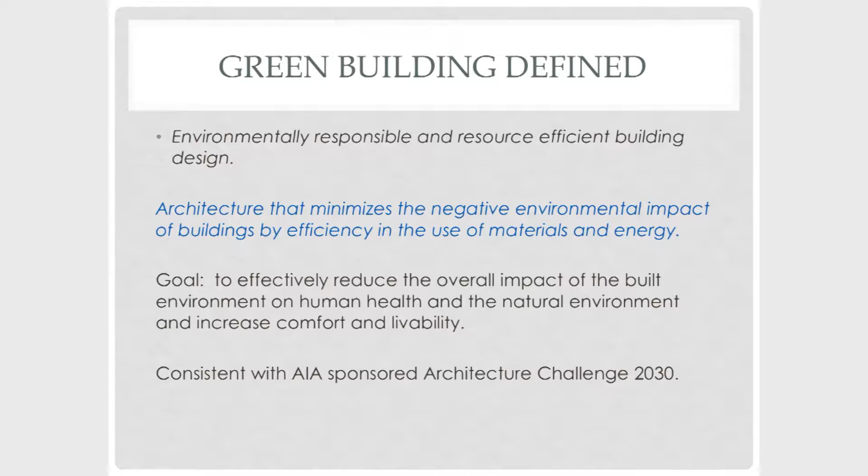Green building is an environmentally responsible and resource efficient type of building. It's architecture that minimizes the negative environmental impacts of buildings by efficiency. The goal is to effectively reduce the overall impact of the built environment on human health and natural environment and increase comfort and livability. So that's what green building is about.

This is consistent with the AIA-sponsored Architecture 2030 Challenge. I don't know if many of you are aware, but this is a movement taken on by the AIA president to take an effective leadership role in the crisis of climate change. It's been shown that the building industry is actually the worst culprit in this problem. This was not obvious to many, but as more and more smart people looked into this, it became evident that buildings are really the consumers of the vast amount of energy and the creation of greenhouse gases.

So it's very, very critical to change the way we design and build buildings to effectively address the problems that they create.

So this is, in a nutshell, the Architecture 2030 goal: through incremental steps, reduce the fossil fuel consumption of buildings by measurable metrics each 5 years, so that by 2030 we reach a carbon neutral state.

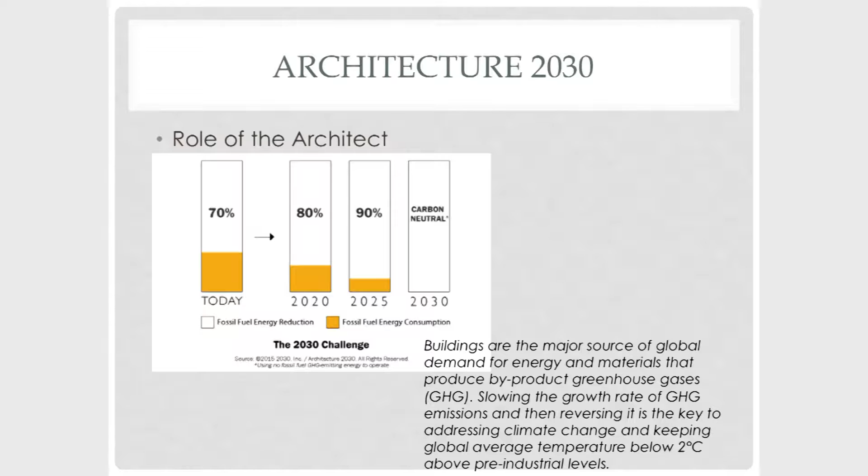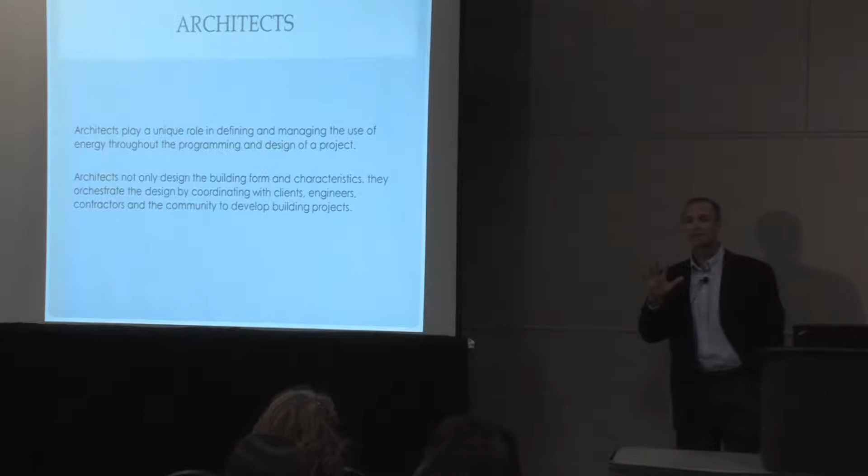So architects are key to leading, or at least being involved in this, in how the sustainability of the sustainable design takes place. So, while our built environment constitutes the problem, sustainable design and building offers the solution.

Green building aims to reduce the environmental impact of buildings. Clear and simple. The first rule is that it's always better to not build at all. If you have an existing building, then that is preferable to building new altogether, because new building always degrades the environment, and if we have plenty of building stock, adaptively reusing buildings, converting them to new uses to suit our needs, is far less energy intensive and far more preferable.

So the second rule is that every building should be as small as possible. The third is to not contribute to sprawl.

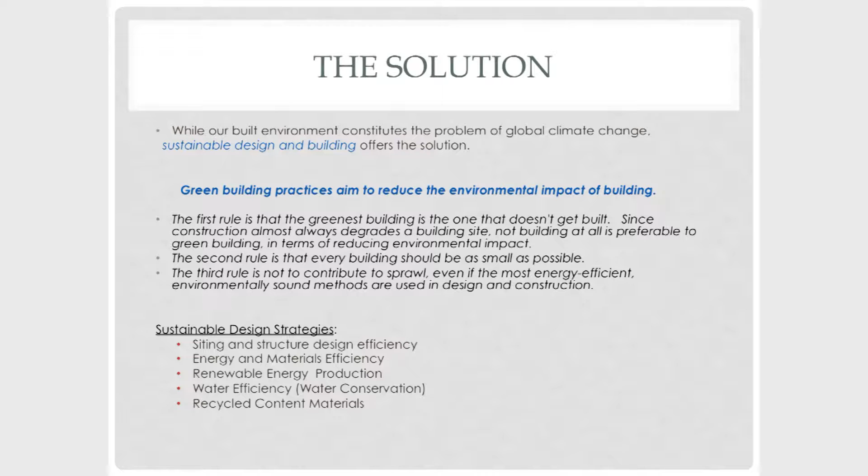There are several sustainable design strategies that are important that I'd like to illustrate: siting and structure design efficiency, energy and materials efficiency, renewable energy production, water efficiency and water conservation, very important in our state, and the use of recycled content materials. So the next few slides are going to illustrate these concepts.

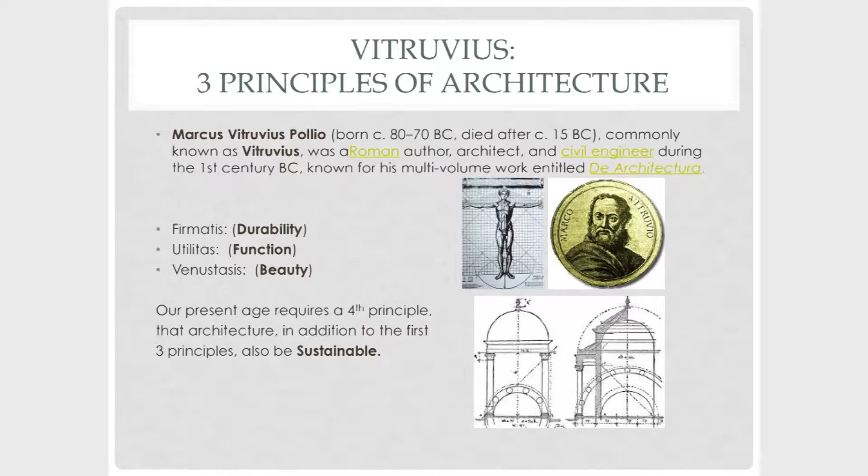Back in time, Vitruvius, a BC writer and designer, had established that for good architecture, you require durability, function, and beauty. Now, in our age, there's a fourth principle, and that's sustainability. But you cannot forego the other three in place of sustainability. Sustainability just gets added on to that. It still has to be beautiful, functional, and durable.

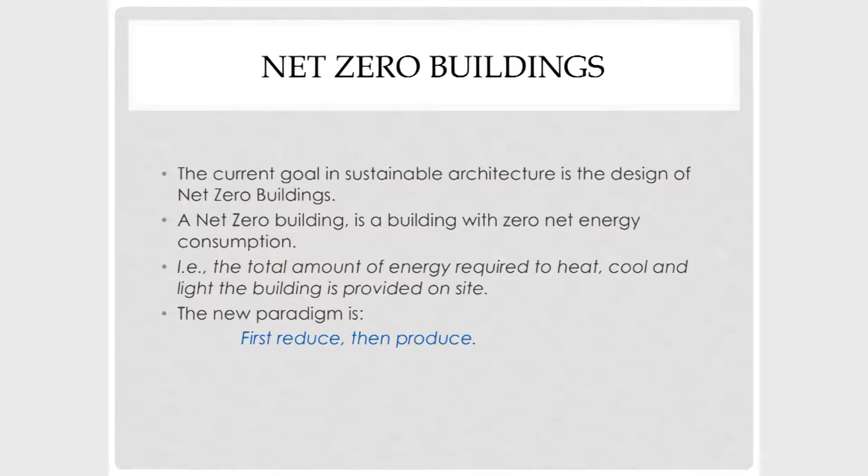So nowadays, the current goal of sustainable architecture is net zero buildings. We are aiming toward reducing the amount of energy used in the building by design to make the load of the building as small as possible. Then it's manageable, it's easy in fact, to provide that amount of energy with an on-site renewable energy system like wind or photovoltaics. So the paradigm is first reduce, then produce.

It doesn't make a whole lot of sense to just put a massive photovoltaic array on a very inefficient building. That's not good design. So this is an example of a net zero house.

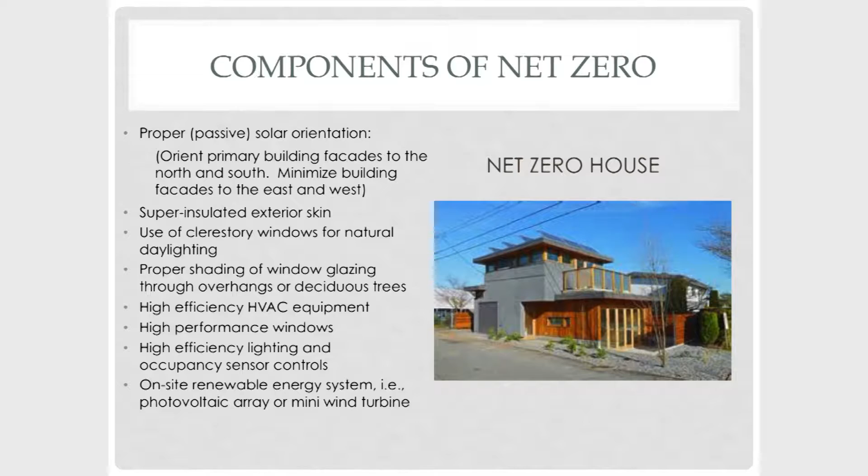This incorporates the following design strategies. First and foremost is to orient the building facade to the north and south, minimizing east and west exposures. Use a super insulated exterior skin, clerestory windows for natural daylighting so you don't need electric lights on during the day, proper shading of window glazing, high efficiency HVAC equipment, high performance windows, high efficiency lighting, occupancy sensor controls, and an on-site renewable energy system like a photovoltaic array or wind turbine. The next slides will illustrate each of these bullet points.

First, passive solar design with east-west orientation. The building is primarily oriented to the south and north, where it's easy to control how the sun enters. You want the sun to come in during the wintertime for passive heating, but not in the summertime. With the right length overhang or awning, it's very easy to achieve that.

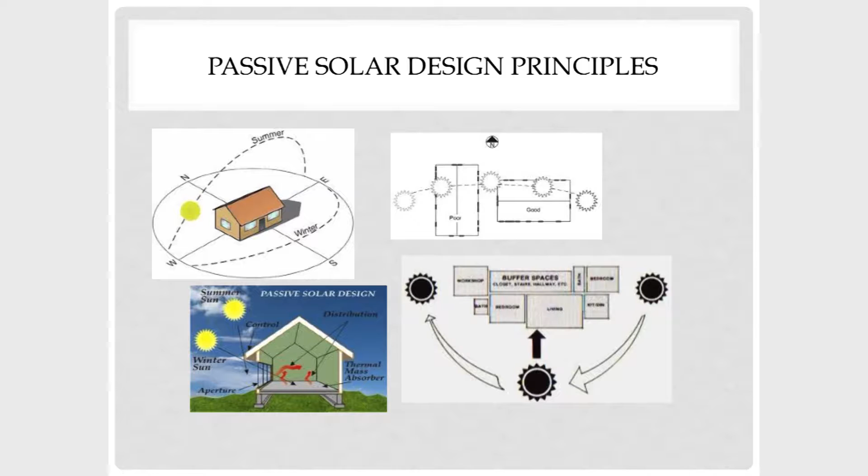Next, super insulation, which means going beyond code minimum. Code minimum in our area requires about R13 or R15 for the wall. You want R40 for a super insulated wall, and R60 for the super insulated ceiling. This results in an extremely well insulated envelope that keeps the heat and cool you're trying to maintain, reducing energy loads dramatically.

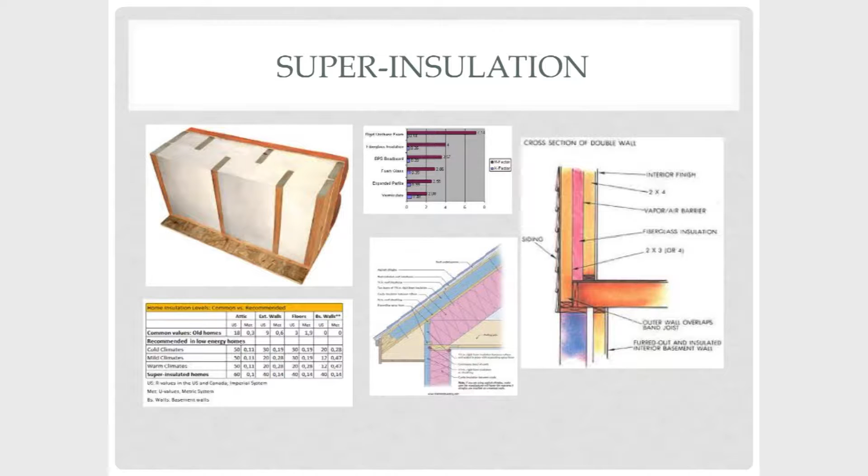You can also see this in the slide here. It's a very effective way to get a double insulated wall, but they stagger the studs so there's no thermal bridging. The studs constitute a weakness, a thermal bridge, where heat transfer goes more rapidly. By staggering the studs, you minimize that amount of heat transfer. It works very well.

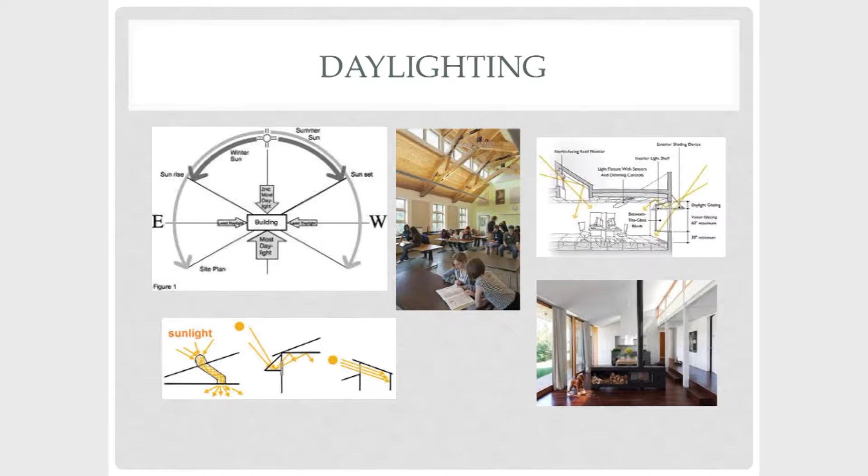Daylighting: windows up high in the space, shaded on the south, don't even require much shading on the north, will bring in ambient daylight and eliminate the need for electric lights during the day. These are very effective strategies, demonstrated especially in classrooms—these high-performance classrooms—and it's been proven in testing that kids test much better.

The learning environment is better when they have natural daylighting to work by. But it's the same with a house—it just feels better.

Shading devices: as I mentioned, awnings to shade the glass, exterior louvers. The idea is to keep the sun off the glass, because once it's inside the space, it's already heating things up.

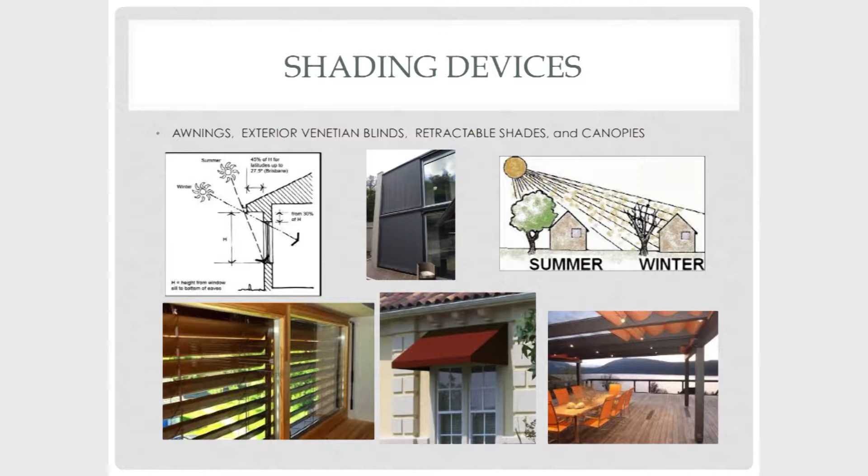This is an example of a properly sized overhang. It admits the low angle winter sun, which is what you want, but blocks the high angle summer sun, which is also what you want. That's a south facing window.

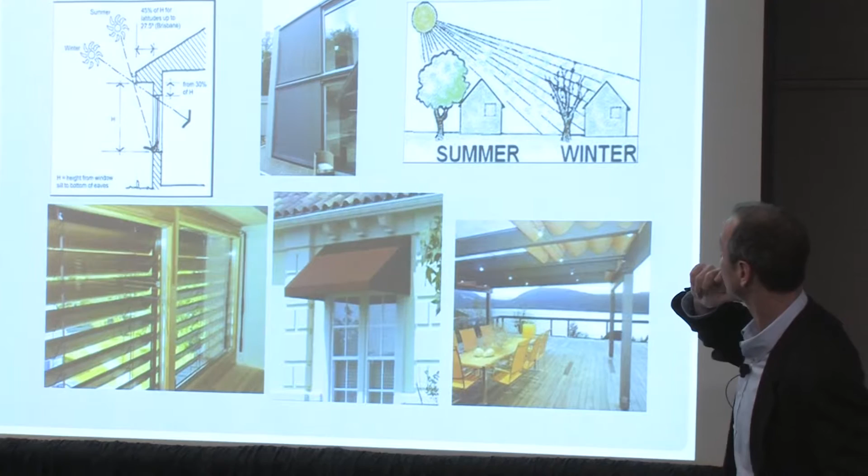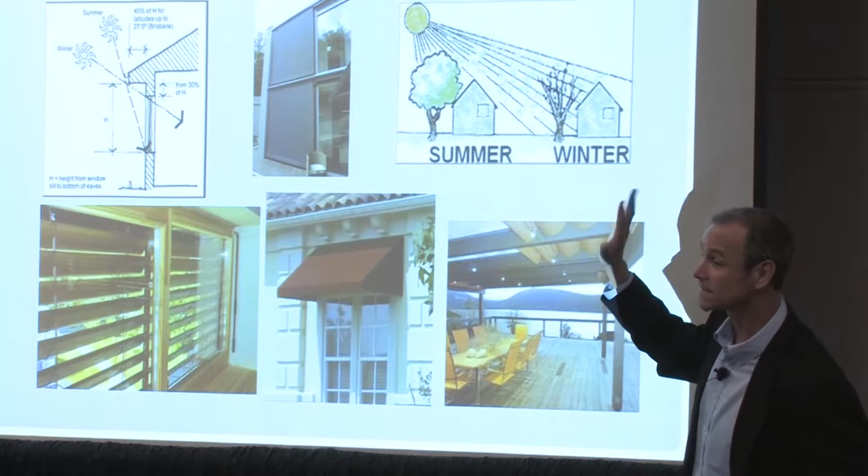In this diagram, we see that an effectively placed deciduous tree lets the sun in during the wintertime and blocks it out in the summertime. As simple as that.

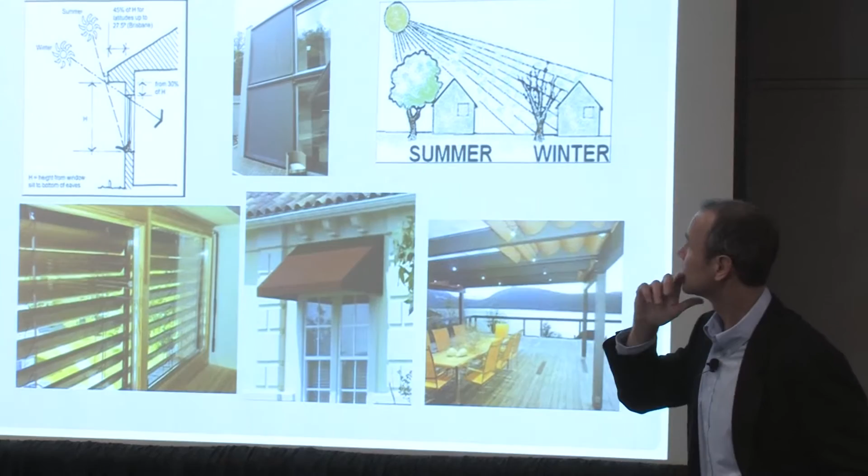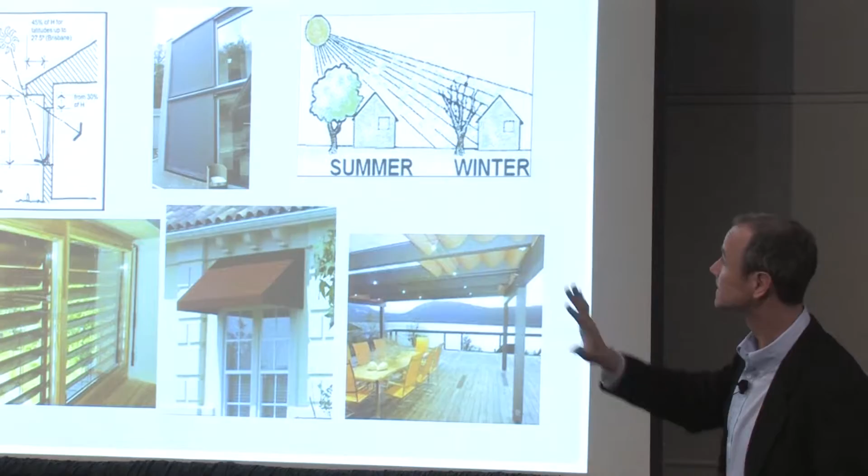Retractable canopy awning, and in this case, a retractable shade. These are kind of retrofit options that were installed after they realized that if they had designed proper overhangs, this wouldn't have been required.

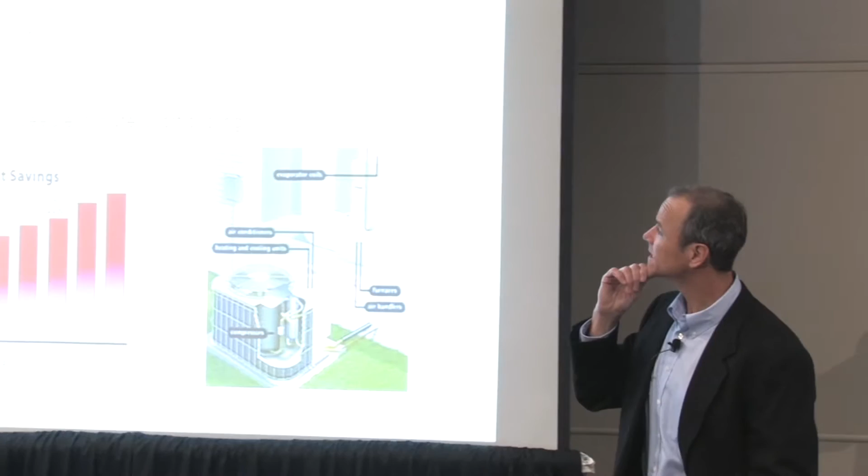Another component: after you've made your building energy efficient through insulation and design, you will need a much smaller cooling system in our climate to take care of the cooling load. But a high SEER system will operate at even greater efficiency, taking it to another level, as well as having a properly sized mechanical system so it's not oversized.

Typically, mechanical systems are oversized, and as soon as the thermostat registers that it needs to kick on, it blows too much air in, quickly cooling down the space in the summertime, and then cycles off. Five minutes later, that cool air is dissipated and it cycles back on. It's called short cycling, a result of inadequate insulation or sealing of the building combined with an oversized HVAC system, which just runs continuously and costs.

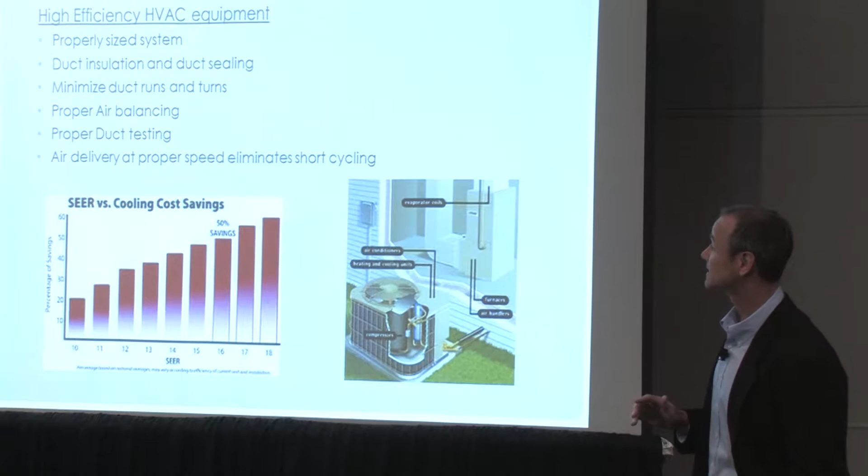This is where you're getting bills of $500, $600, $700 a month. When you've got this scenario, that's the reality. So a properly designed mechanical system is another critical aspect to the whole equation.

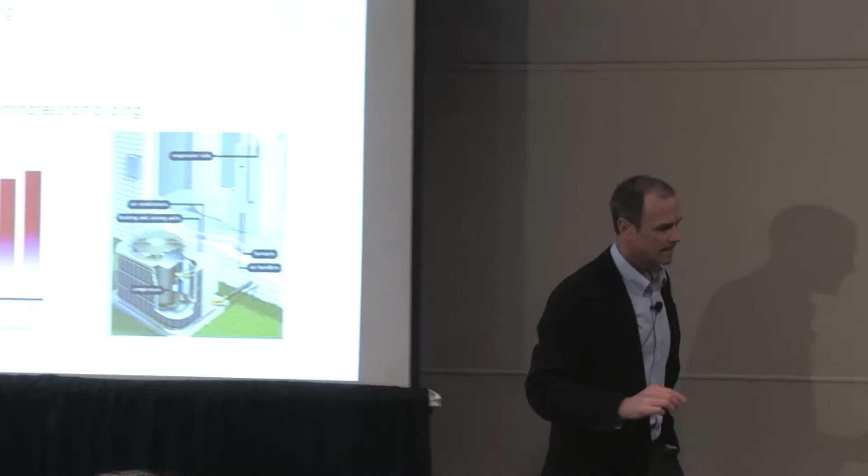What's SEER? SEER stands for seasonal energy efficiency ratio, and the higher the SEER value, the better. Nowadays, they're up into the 18, even 22 range.

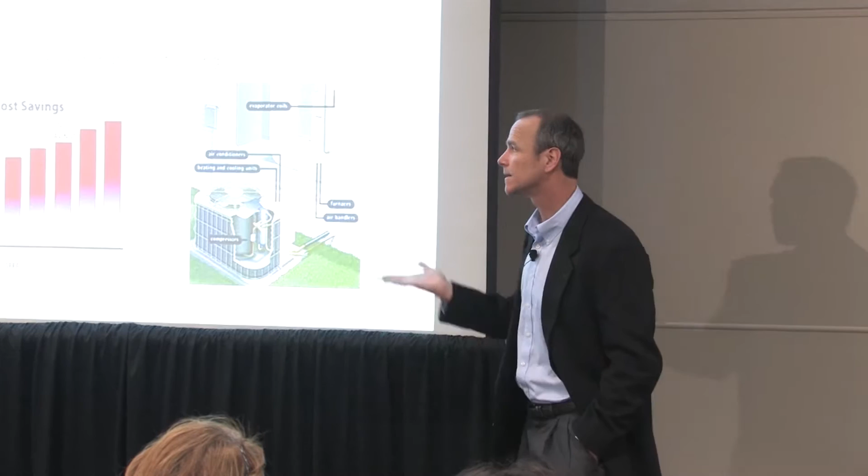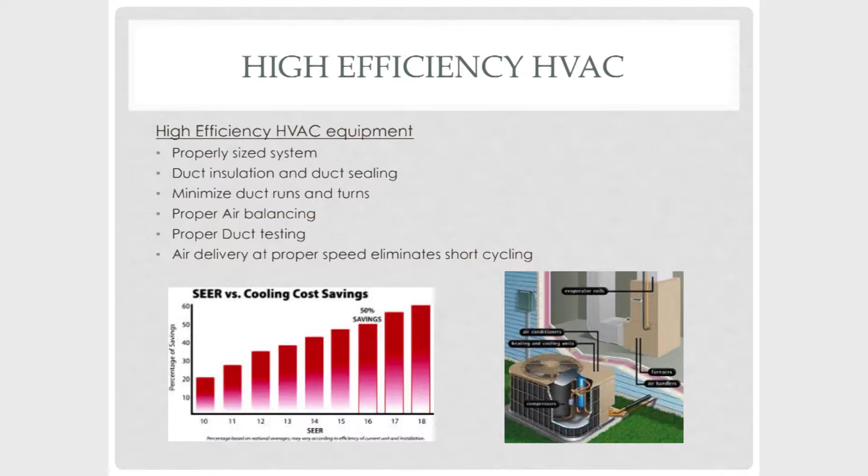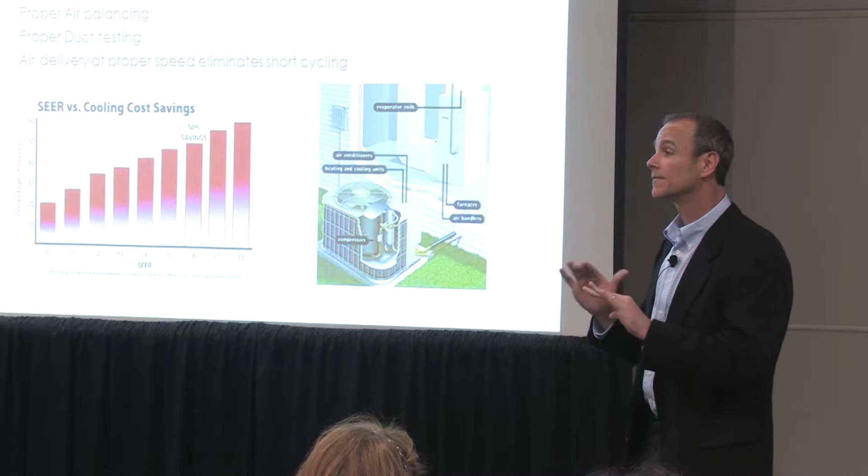The higher the SEER value, the more efficient the system is. But you do pay a premium for these high SEER cooling systems. With a properly designed house and high levels of insulation and sealing, you probably won't even need a high efficiency system. You can get away with a less efficient, smaller system. So the overall design of the building is really important to integrate everything, maximize efficiency, and minimize the loads.

Okay, so another part of this is the windows, since much of the heat gain and loss is through the windows. They represent the weak part of the wall envelope.

Nowadays it's typical to use dual glaze windows with low emissivity. Emissivity is a property that will bounce heat back from the outside, but keep it in on the inside. It works very well. But in extreme climates, and even in this climate, I've seen them use triple glazing, which can get an R value of up to 11 or 13 with some manufacturers.

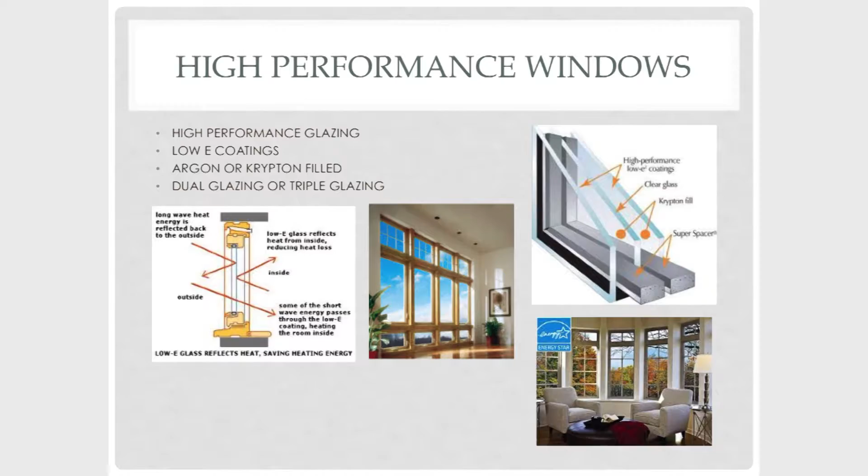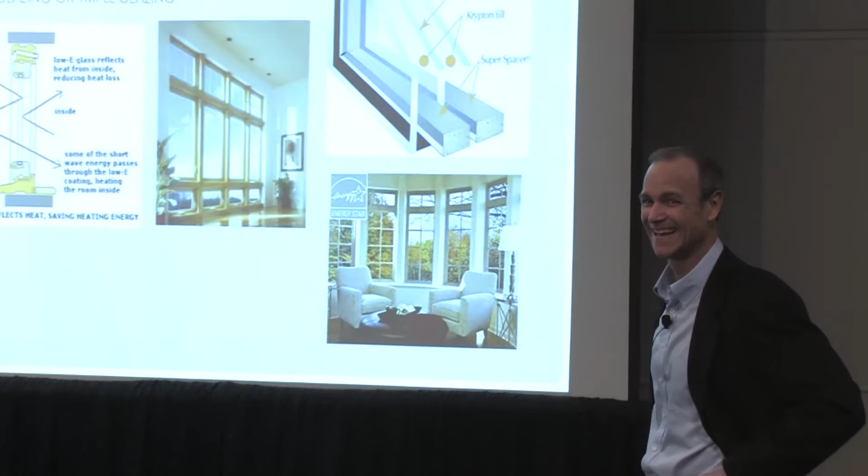We have these windows in the house. We took more time determining what kind of windows we wanted than whether we were to get married or not. Months to figure out the windows, and we got married in like 4 months instead. But I mean, we really studied them.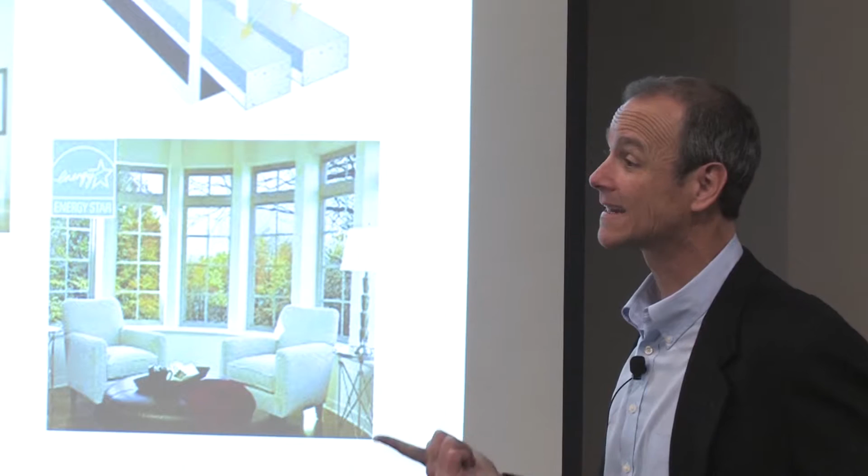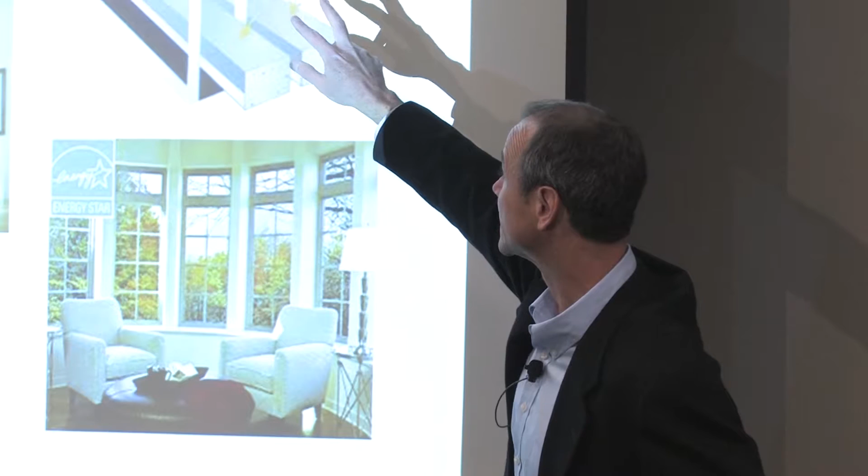But it seems to me that over the years, do they become less effective? No, they shouldn't degrade appreciably over a long period of time, at least 30 years. They should stay very... Is there a gas in between? There's a gas, yes. Would that degrade in some way? I haven't heard of that, but I'd have to look into it. The most effective gases are argon and krypton. Krypton is even more effective as an insulator, and that's why with triple glaze and two layers, gas gaps on either side of the middle layer really increase the efficiency measurably. So that's high performance glazing.

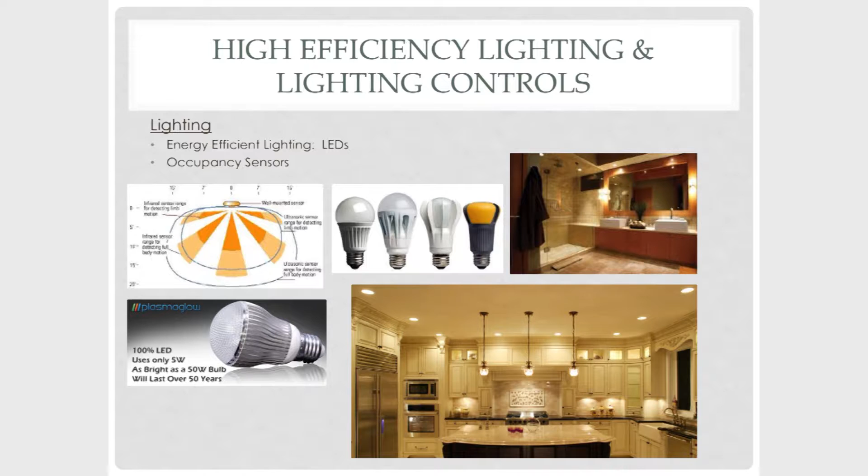Another aspect to the sustainability pie is materials efficiency. When you're doing new construction or an addition, there's a great variety of materials that are very sustainable because they're either recycled content materials or made from renewable sources, like these roof trusses, for example. All 2x4s, so there's no old growth timbers required to build this roof. Very economical, very sustainable.

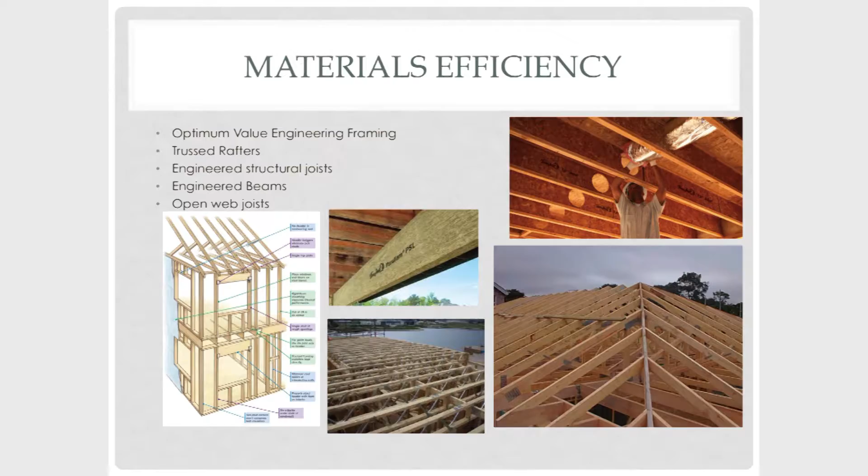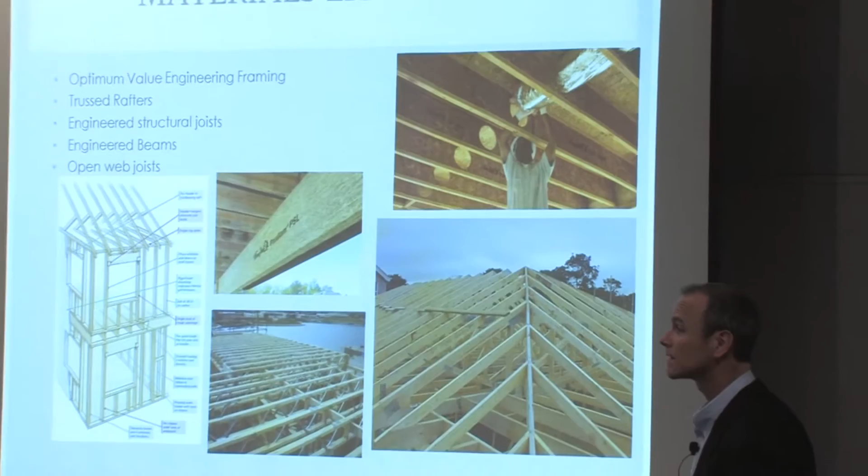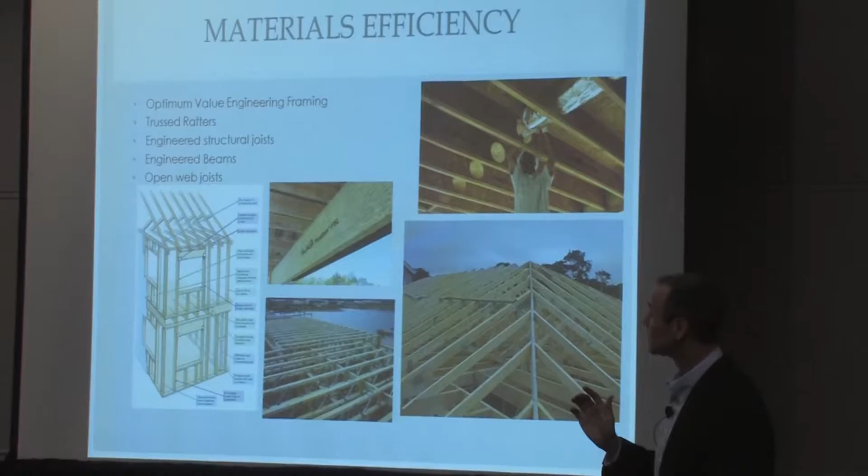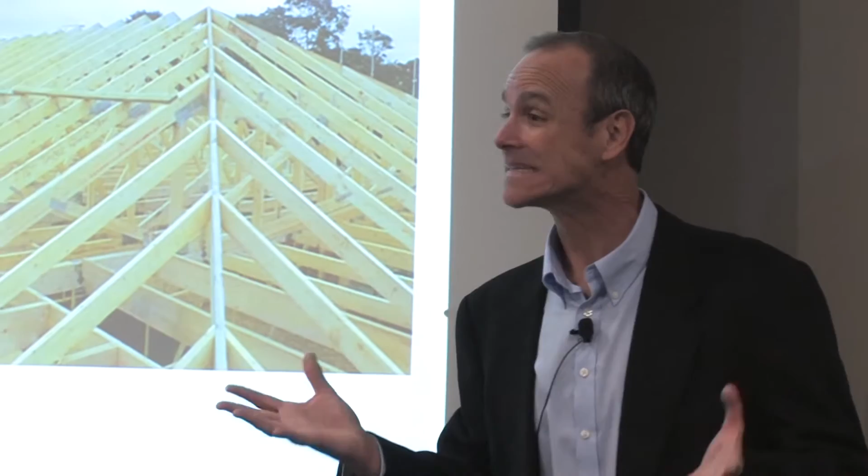These products, like I-joists and engineered beams, are also primarily made from recycled material. And here's another method of framing called optimum value engineering, where instead of studs spaced at 16 inches on center, which is conventional, they space the studs 24 inches on center. The siding and gypboard can still span 24 inches, but you effectively use a third less studs, and increase your insulation value by a third. So it's a great way to build. Even though it's a great idea, some builders are still reticent to embrace it because it's newer, and the construction industry kind of likes to do things the same way.

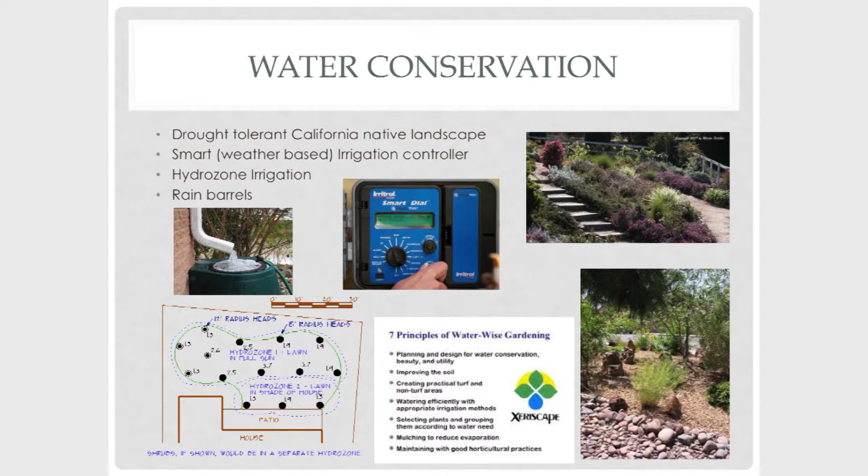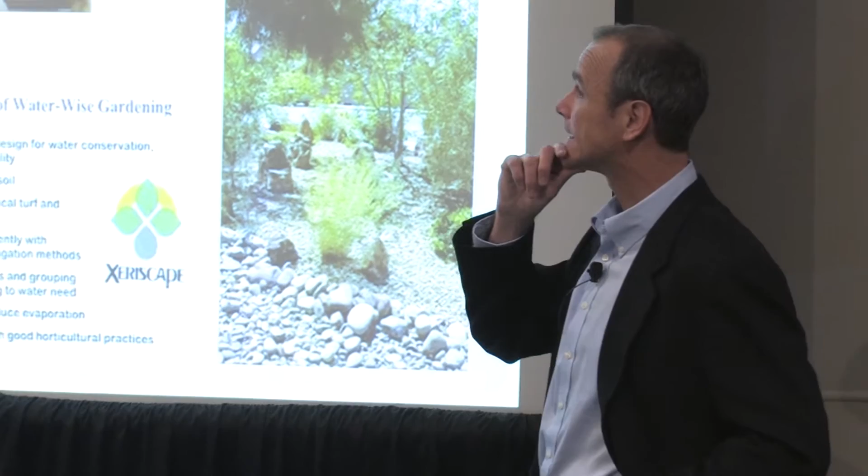Another aspect of the puzzle is water conservation. In California, native California plantings arranged in hydrozones so that each plant group - you group the plants with similar water needs - and therefore you reduce waste there. Everything should be controlled by a weather-based controller, so that depending on the weather conditions, your garden gets less or more water. It's standard for commercial developments nowadays; they're required to have this. Not too far in the future, I'm sure residential design will require these as well.

Another idea is rain barrels. It's kind of an old-fashioned idea that is still valid today. Cisterns.

Okay, so far most of these slides have been about new construction and what you can do if you're starting new or doing an addition. But many people have an existing house, and it may not be the most efficient house. There's still a lot you can do to reduce energy, to save money, to increase comfort, livability, and increase your home value.

The first, most effective energy retrofit measure you can make is to air seal the house. This is by means of caulking and visqueen where it matters, where it is required. You effectively seal off all the gaps in the house so that the air stays in.

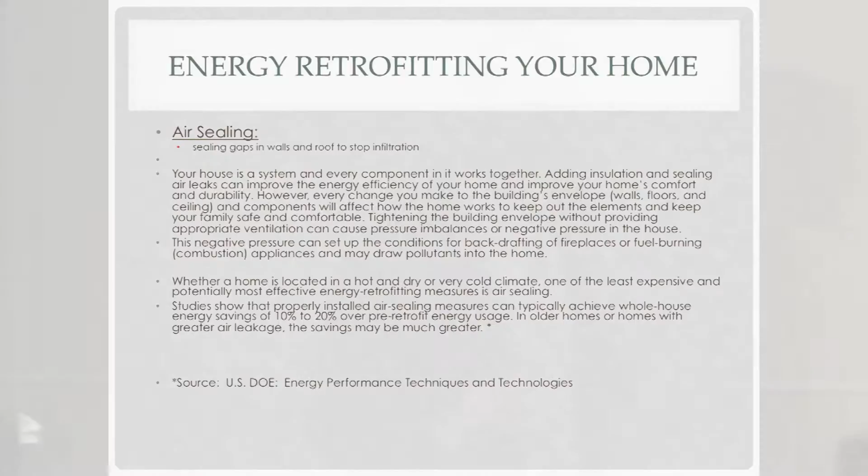When this is done, it has to be done by a qualified person who can also evaluate your gas-burning appliances and properly ensure that they are vented out of the building. If there's a gas leak in your house and suddenly you seal this tight, then you've got a real problem. So it's very important that this is done by qualified professionals, and I'll get to that in a minute. But air sealing, number one.

These are some of the tools that are used by qualified contractors. This is a blower door, where they're pulling out all the indoor air and ejecting it to the exterior. This creates a vacuum, and then air is drawn in from outside through any cracks in the building, and that is measured. Then they can identify where your leaks are.

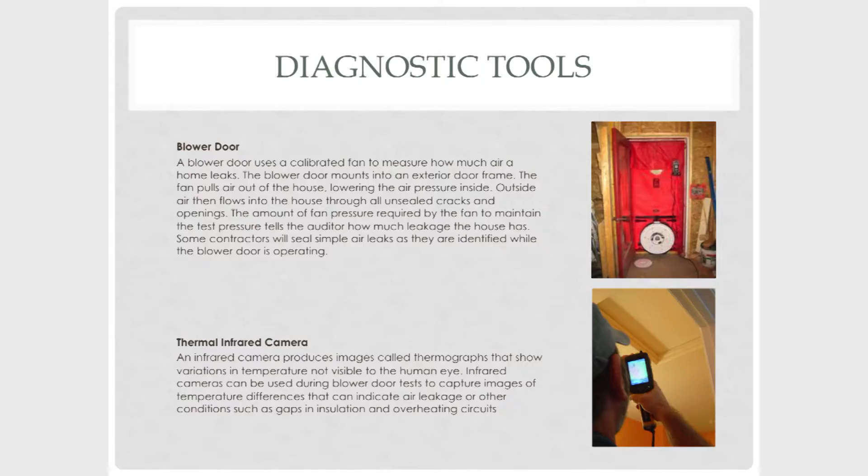Here's another tool, a thermal infrared camera that shows where heat is escaping or coming in through gaps in insulation, for example.

The next most effective thing you can do is to insulate. And if you can super insulate, great, but even just proper insulation is more important. If you have an uninsulated house, then you would want to insulate the ceiling first and then the walls.

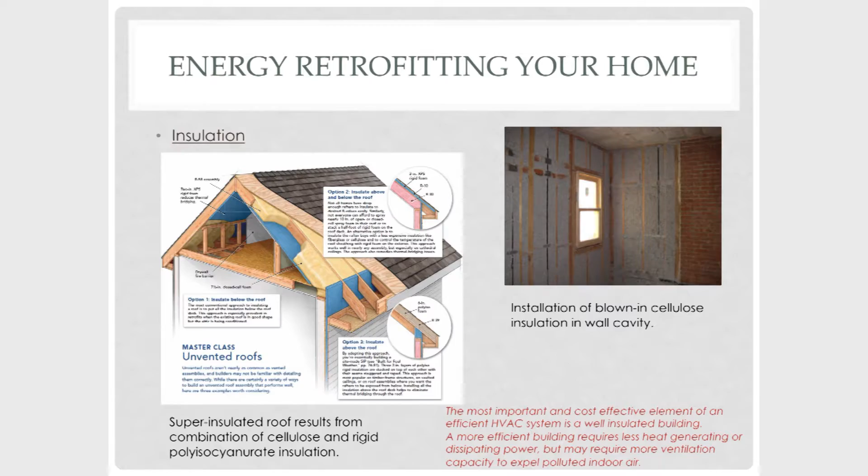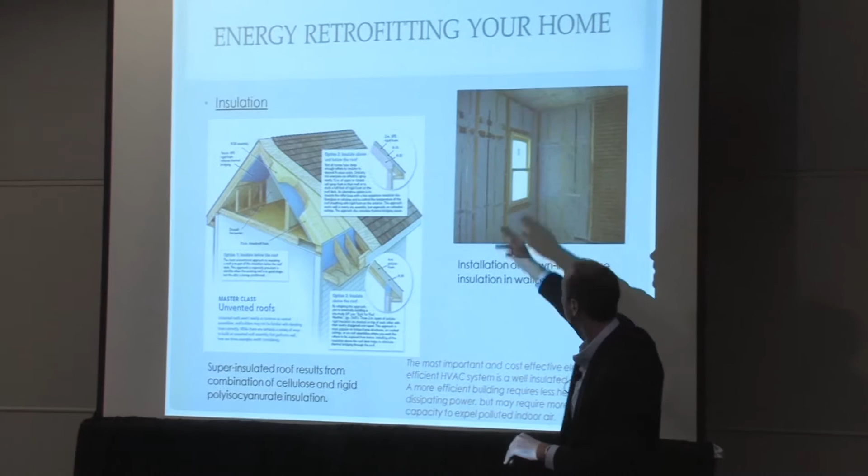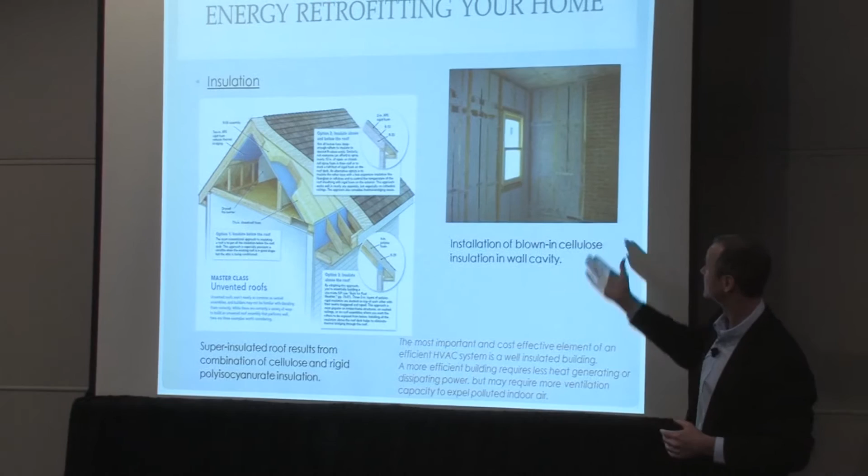And this is my own house, actually, and I used a product that's blown in. The problem with batt insulation is that it's almost impossible to install it perfectly. There's always gaps, and wherever you have a gap, you've got a breach in your envelope. The blown-in products seal as they insulate, so they get into every corner, cranny, nook, even around vent pipes, and there's no way that batt insulation can do that. Batt insulation is cheap, but it doesn't get you very much. So this is not an expensive product, but far superior because it actually seals as it insulates.

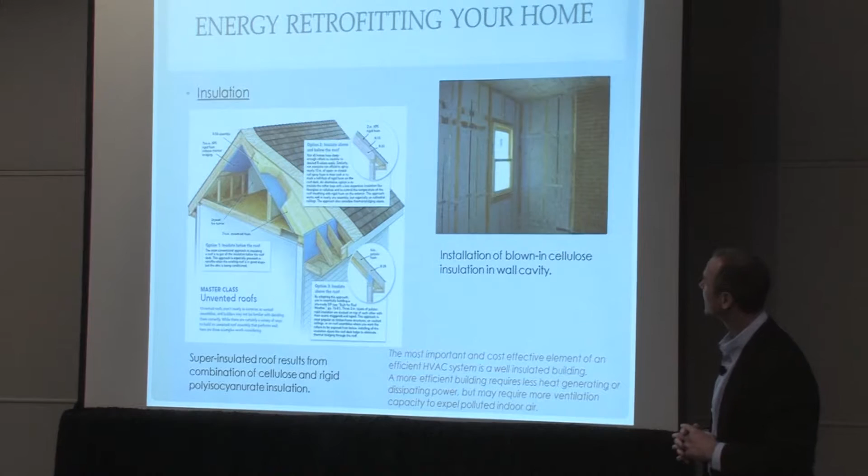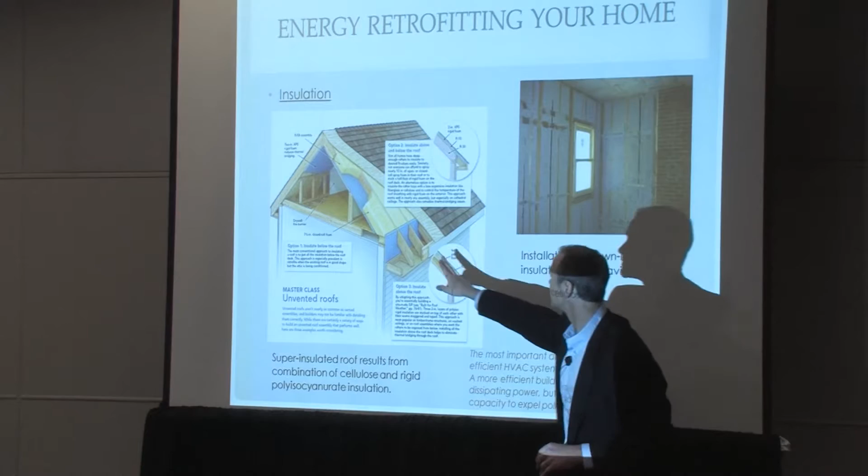So this is blown-in cellulose. It's made from recycled newsprint, borate treated so it won't burn and insects won't eat it, and it's a very effective product. In the roof, if you were to enclose an attic, for example, then you can blow this cellulose insulation between the rafter bays, and then as an added layer you could add rigid insulation to the underside of that, and create a very effective insulation layer at the roof.

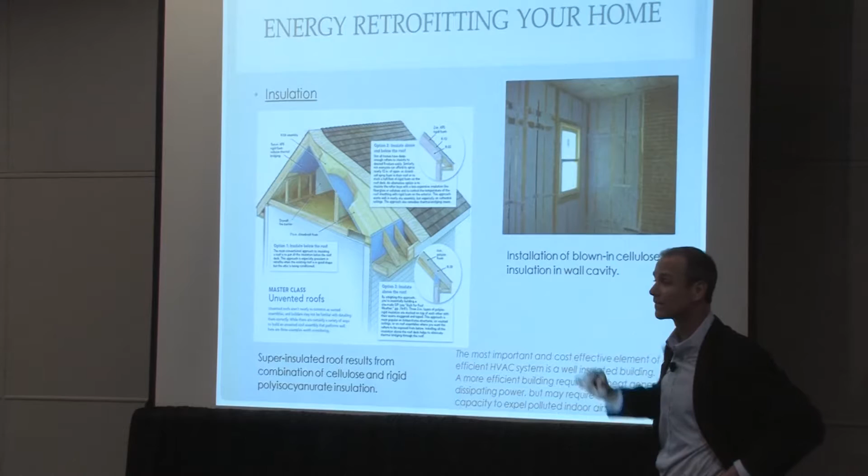So if these measures were taken, then your HVAC system, the mechanical system for cooling, would be greatly reduced. Question: so in your own home, is that as you were building, or can you go into an existing home? Right, this was, in this case, an addition, so it was very easy to do this. But with existing construction...

it's possible to use the same method, but they drill holes in between each stud cavity and blow the material in. In extreme cases, you can also remove the drywall and blow it in, and then you're ensured that everything is solid. But if they drill the holes and are careful, and hit each bay, then it works very well. So you don't have to rip your walls down? You don't have to, no, no. And then it's just patching and repairing the drywall from the inside.

And the price, how does that compare to regular insulation? It's comparable, yes, it is more for sure, but maybe a third more roughly, but it's far better, because it works so much more effectively than batt insulation.

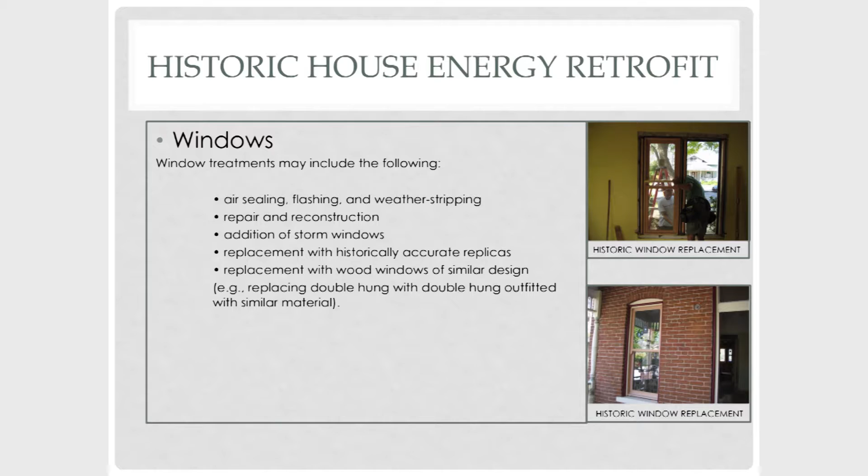This is my own house again, which is an historic house. But the windows were 120 years old, and they were not salvageable, they were in such bad shape. So I actually got estimates to rehabilitate the windows, to rebuild them, and it was more than the cost of new windows. It didn't make sense. So preservation has to be practical too. And anyway, the new windows come with a warranty, the rehabbed windows wouldn't have.

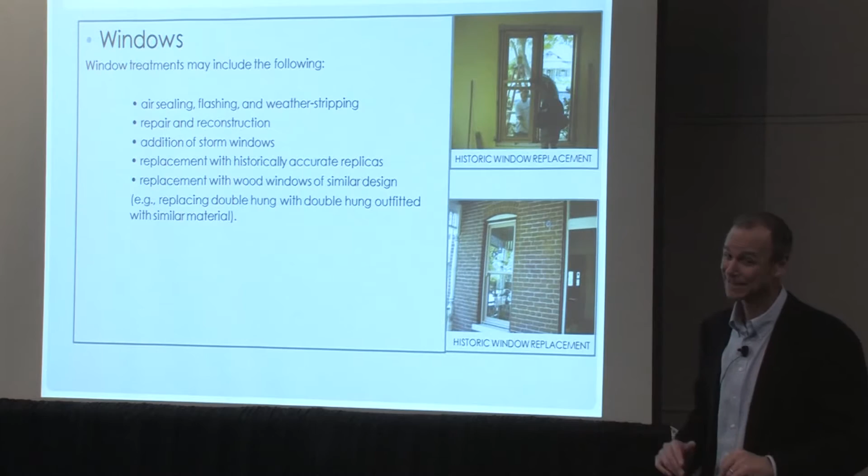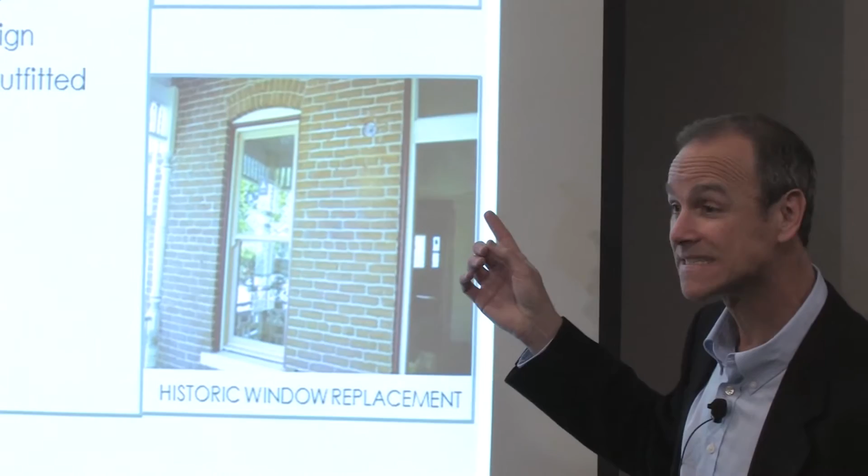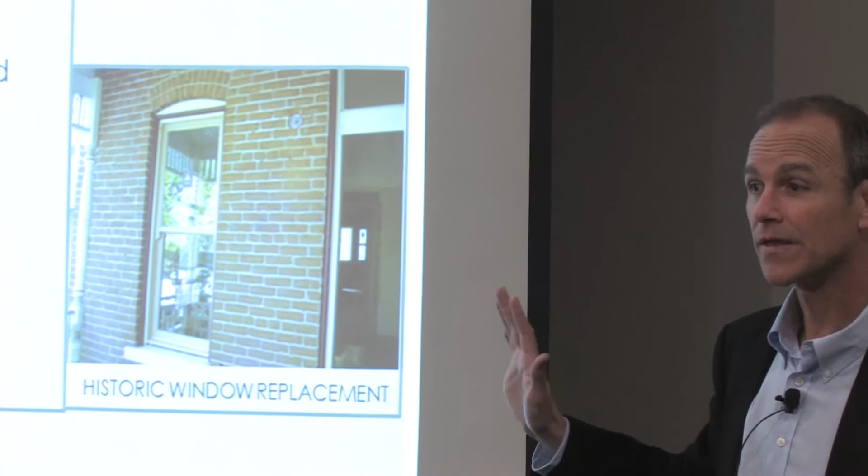So in this case, I embraced the notion of new windows, but was careful to ensure they were the same kind of window, the same frame material, wood in this case, Victorian house, and had them match the historic details of the windows, so I maintained the historic integrity of the building. But the glass isn't the same, the glass is brand new, and it's actually dual glazed and low E and all that, with argon.

And that's the beauty of historic windows, that's why that should be the last thing you should do if you own a historic home. Do all these other things first. Keep your windows, unless they're in such bad shape that you know you've got to rebuild them, or they're all broken. But honestly, new windows will not replace that beautiful wave effect. That's for sure.

Okay, of course, energy efficient appliances. That's kind of common sense, but I mention it here because this is another easy thing to do, including tankless water heaters, which are very energy efficient, gas-fired tankless. They work very well. And your refrigerator is an energy hog, and if you have an old one, you can save a lot of money just by replacing that.

But the newer tank-style heaters are also very, very good. So it really just depends, I can't say tankless is better than tank, it just depends on your situation. But if they're Energy Star rated, then you know that they're good.

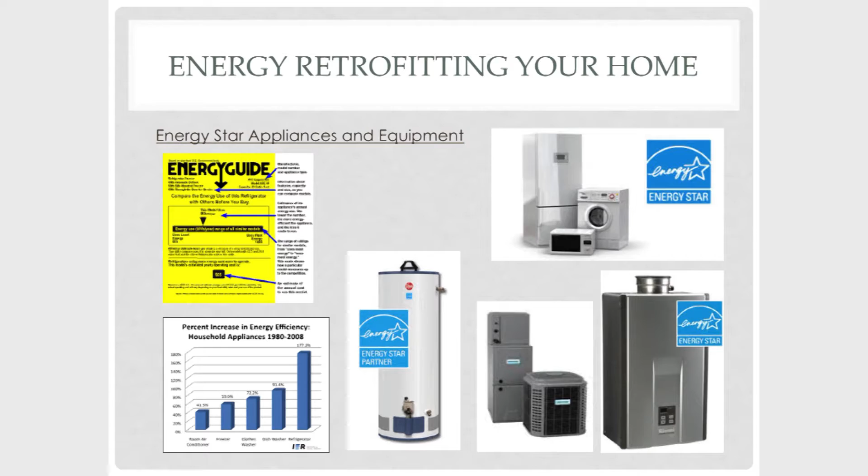Okay, finally, green materials, and there's a lot of them out there. The problem is a lot of materials are greener than others, and a lot of manufacturers try to tell you they're green when maybe they're not. So you really have to do your own research, honestly. There's a lot of greenwashing out there, and that's no lie.

But for sure, materials like bamboo, a beautiful material, very great for flooring, for cabinetry, even countertops. But you should also be careful where it comes from. A lot of the bamboo is coming from China, from such a long distance that in a certain way it loses its value of being a really green material because of the carbon footprint of the transportation. So it's preferable to obtain materials from local or closer sources, like within 500 miles, which is considered green. A lot of this is coming from Seattle and that area, and that's a lot better.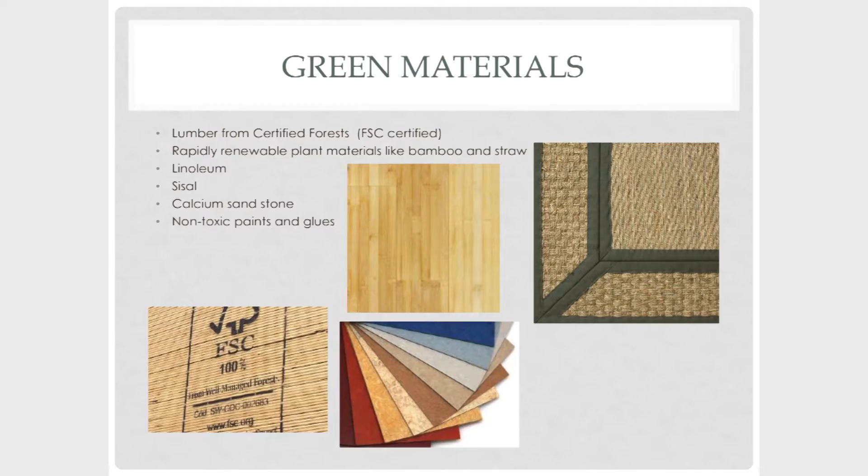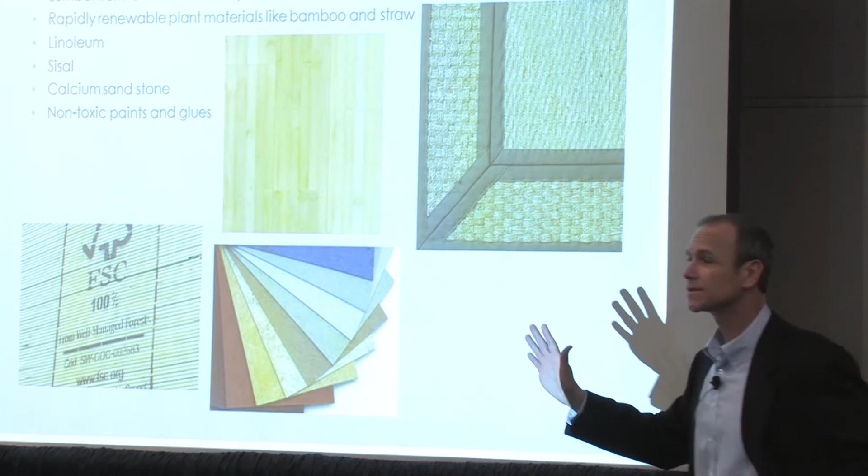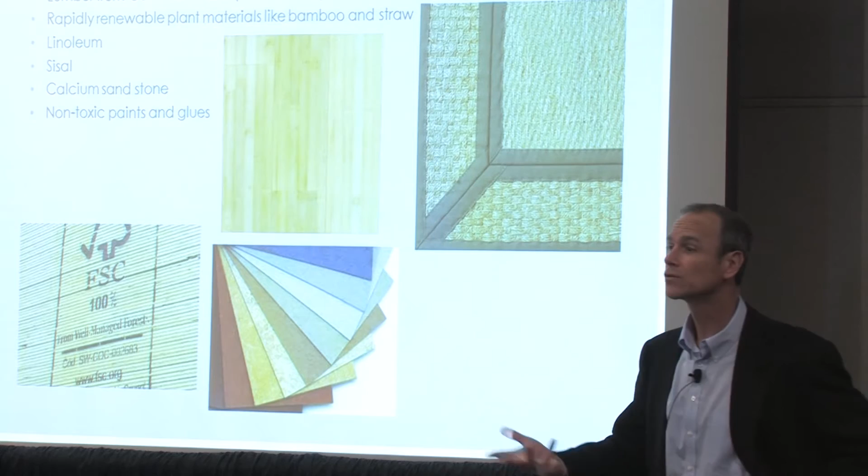Sisal is also just interesting, a very environmentally benign material, used in fabrics and rugs and tapestries, things like that, with a lot of colors, a lot of design. Linoleum has a huge application in flooring mostly, and it's been used for years in medical, in healthcare settings because it's hygienic. It doesn't off-gas any pollutants, and nowadays the new linoleums have a lot more color choice, a lot more variation, and they're quite beautiful. So we use those a lot.

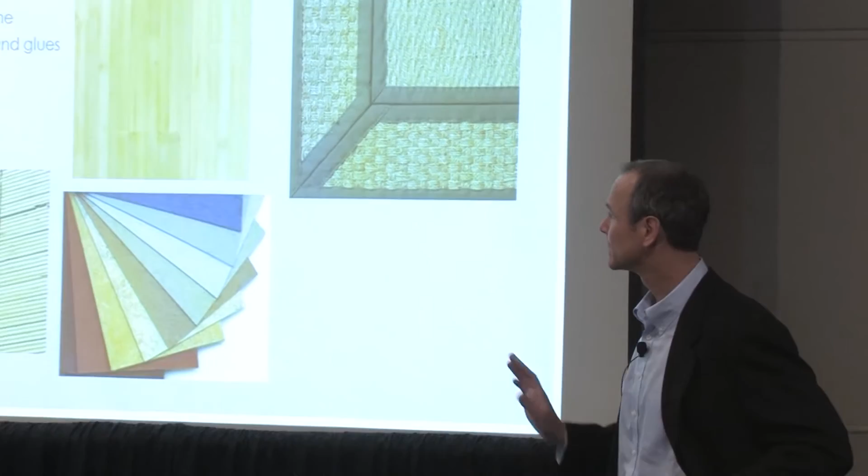And then the wood that we specify these days should come from FSC certified sources. That means the Forest Stewardship Council, and they're charged with overseeing the logging and forestry practices of these mills. So if it's FSC certified, that means they're abiding by sustainable logging practices, so they're not clear cutting, they're not taking down more than they're replanting, so that the net result stays the same.

The stone is also considered a green material just because extraction processes are pretty mild compared with manufactured stone, which requires a lot more heat and pollutants. It's beautiful, the Caesarstone and these other products, but they're not actually as green as the real stuff.

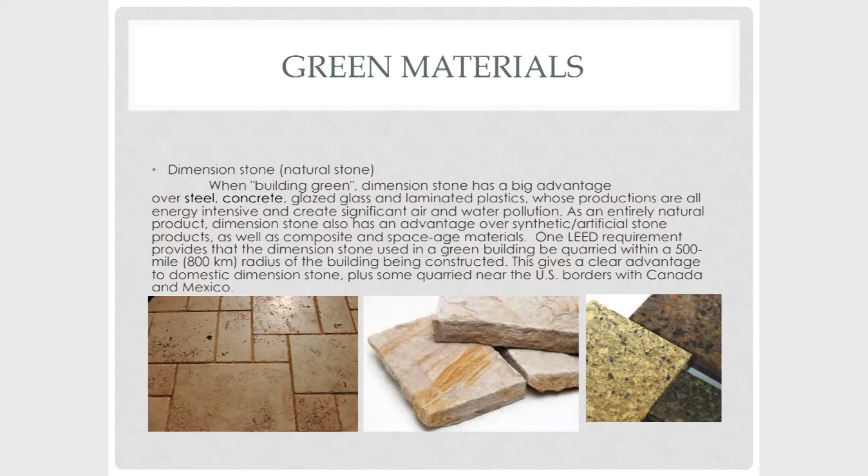So granites, sandstones, limestones, beautiful, and a good choice. Also, if you can get it closer, if you can find out where the source is, then that's better. A lot of them are coming from China and India, and they're exotic and beautiful, and it's a choice you can make, but there are other closer to home sources too.

Qualified contractors, and that will be my next slide. Because you want to get the right people in there who understand the science of building construction, and a lot of contractors don't, and you have to be careful.

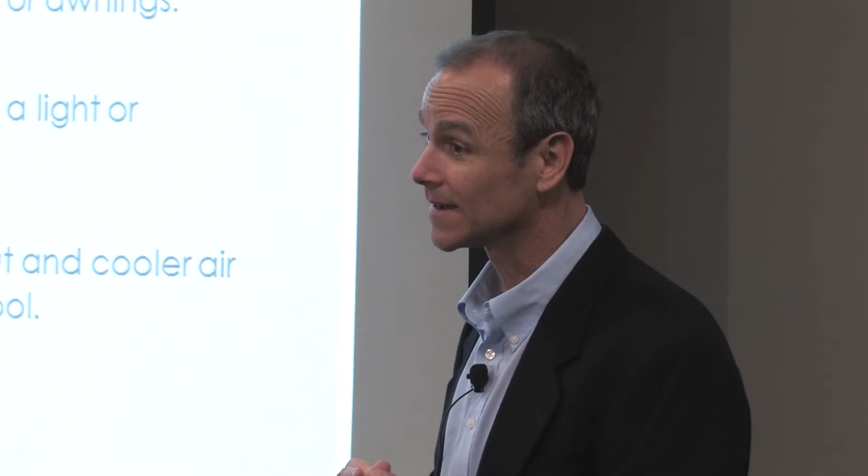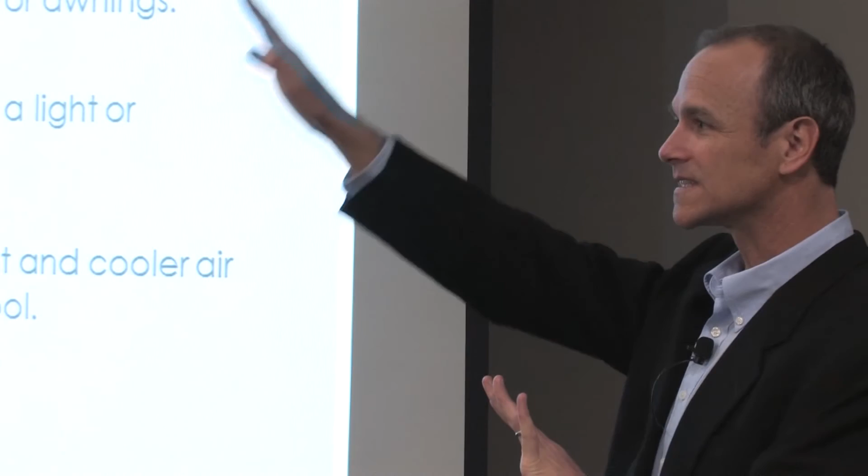So, energy conservation, passive heating. On days like today, where it's a winter day but the sun's out, the sun angle is low. Open up your blinds, let that nice sun in, and at night shut the blinds, and you've gained some free heat. So that's passive heating.

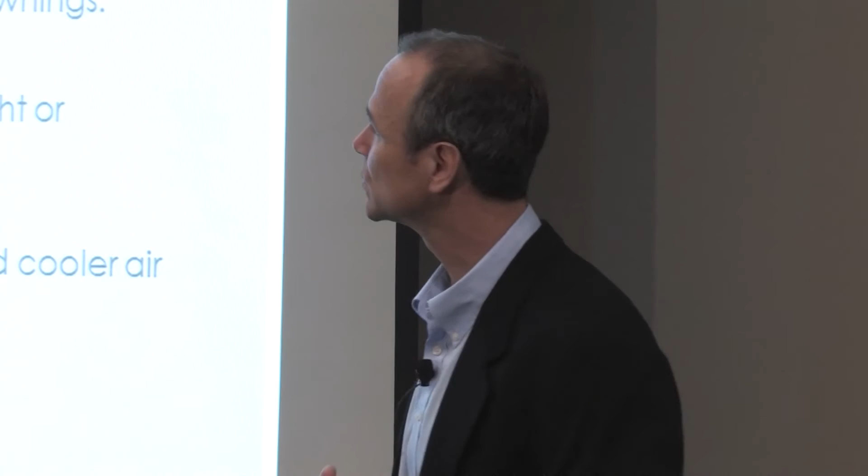Passive cooling, keep that high angle sun off your glass by overhangs, shades, shutters, or canopies. All those work very, very effectively. The problem is, once the sun is striking the glass, it's too late. It's in the space, and then you've got to deal with it through cooling, and then daylighting.

To keep rooms bright, there's a lot of things you can do. Just paint or paper the walls with light reflective colors - that's effective. It bounces the light around, and then windows.

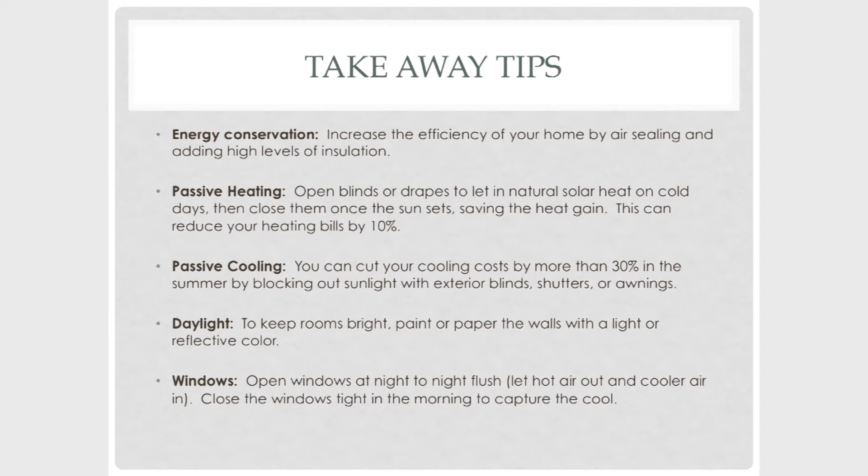Oftentimes we have hot days and cool nights, so it's very effective to open the windows at night, let that cool air in, and in the morning, shut it tight, and you've captured cool air.

House fans are good - yes, they work very well too, by exhausting that heat out. Ventilation, just passive ventilation, especially if you can open up one window on one side of the house, another on the other, then you pull those breezes through and you don't have to run your cooler as much.

Water conservation, a smart weather-based system is key, and everyone should have one. I think it's the most ridiculous thing to drive down the street when it's raining and see someone's sprinklers on. It doesn't make any sense, so that's an important thing that can be done right away.

Yes? And you can purchase one of those at Lowe's? I think they have them at the major places.

I think you also want to work with, you might want to talk with a landscape installer, and make sure that it's coupled with a smart irrigation system. For example, your grass lawn should be on one zone, your plants and shrubs should be on another, your trees should be on another. So you should have multiple zones, all designed according to the water needs, and that coupled with the smart controller will take care of it. But yeah, you probably want to talk with an irrigation contractor just to make it work right.

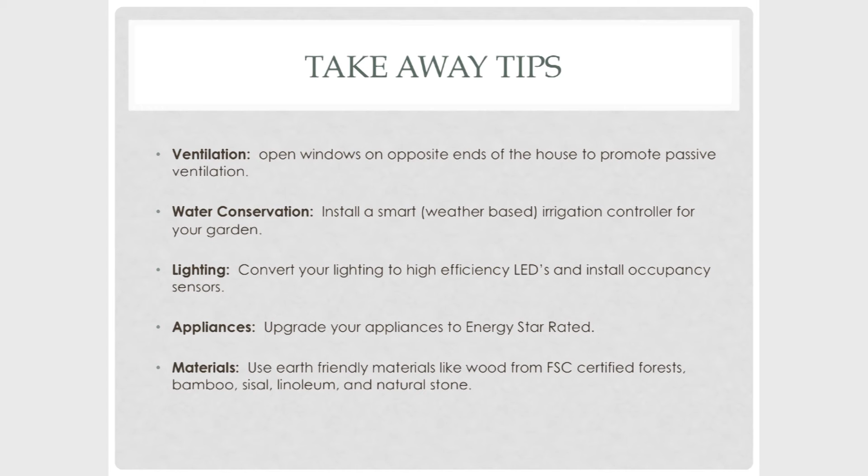Lighting, converting to LEDs, appliances, Energy Star rated, and then earth-friendly materials: bamboo, sisal, linoleum, natural stone.

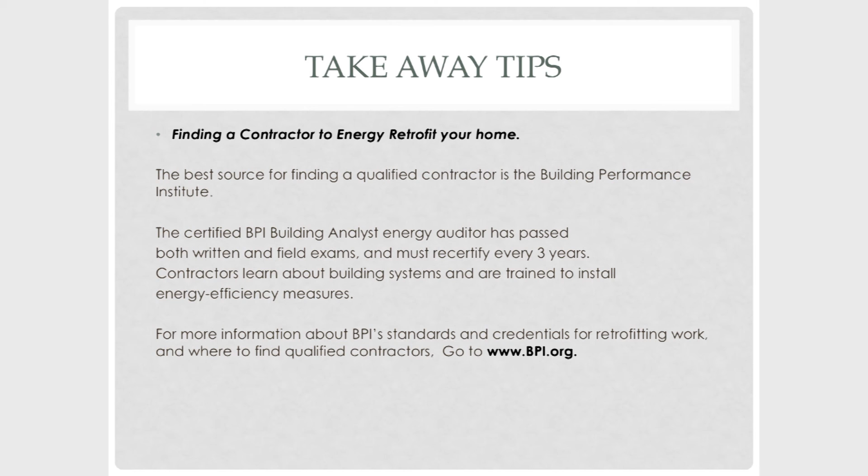Finally, finding a contractor who knows how to do this - a lot of them may say they do, and they may not. BPI.org, this is the Building Performance Institute, and they are the experts on this, really, and they put out these briefs that are exhaustively detailed, and they provide training and seminars. It's high tech stuff, this is building science, and you need to have these things done by a qualified contractor, especially because of the potential dangers that can occur if it's done incorrectly. So there are a number of qualified contractors out there, many in this area.

So that's what I have.